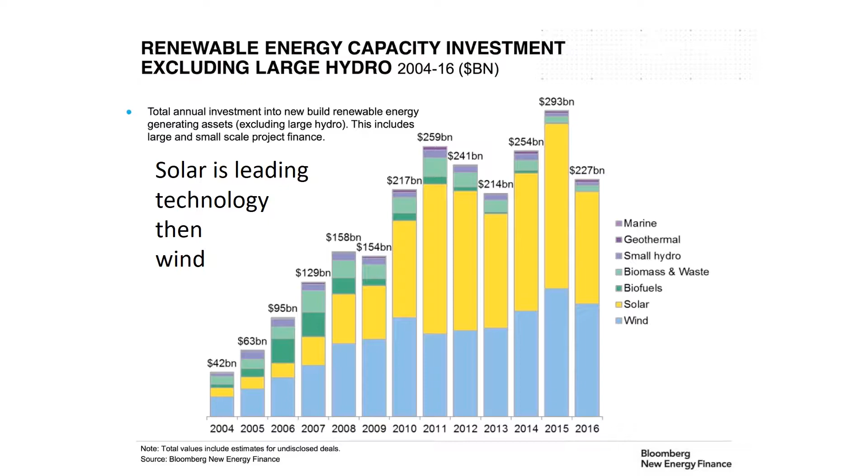The yellow is solar, the blue is wind, and all the other colors are a bunch of other niche solutions like biogas and a whole bunch of other solutions. The ones that are economic and that are dominating the space worldwide are solar and wind. And that has some really interesting implications to energy efficiency and the future of our buildings, the future of how we're going to get around, where we live. It's going to have a lot of impact on us.

So, what solar has done, because it's cheap now, it's so affordable, is it's enabled us to look at buildings in a very different way. You know, if you looked at solar back in the 1970s at the time of the oil crisis, as Tanya was talking about, it would have cost you more than the price of the house to power a house with solar. And that was not that long ago.

In fact, Harold Orr, who was one of the grandfathers of the concept of the passive house in Saskatoon, was asked to build a solar-powered house by the Saskatchewan government at that time. He was at the Research Council. And in the end, he told them, I can't do it because this is not replicable. This is not going to help anybody if we build a house that costs a house to put the solar on the roof. And so instead, he pioneered the concept of the super energy efficient building. And in fact, this guy from Saskatchewan was just recognized in Germany last year for being one of the pioneers in the world of the passive house concept.

Now the passive house, he learned right away that you couldn't achieve this with solar at that time because it was so expensive. And the passive house concept is ultra conservation oriented. So you build a house or a building that is 90% more energy efficient. That's 90%. You require 10% of the energy input of a standard building. And so that's how he got around that, because he was literally forced to by economics in 1977 or whenever it was when he pioneered that.

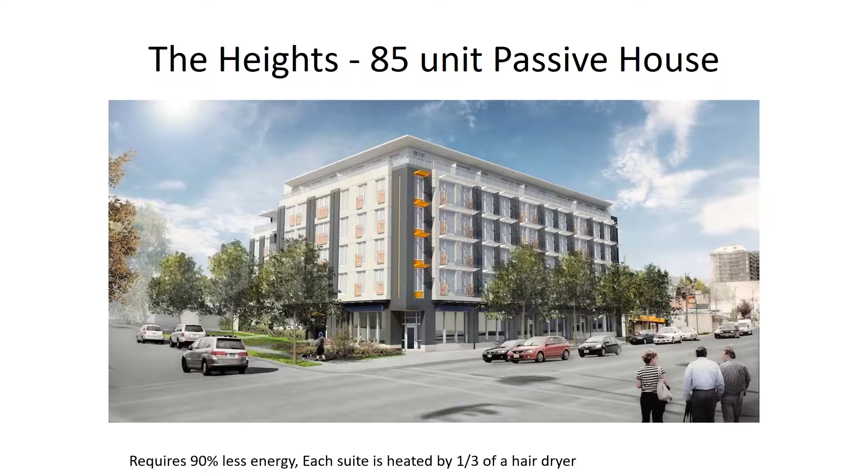Why? Because the city of Vancouver is requiring builders of structures like this that require zoning changes to build to essentially a zero emission standard today. And that standard will be fully implemented by 2020. And so this is a fast-moving landscape, and that's my message, is that the innovation is happening, and following right behind that is policy innovation.

And so this building was able to achieve those goals by building a passive house building instead of using other strategies. And it was so successful, though, and the economics were so good that the architect that built this building, Cornerstone Architecture out of Vancouver, has 16 more commissions to build buildings just like this before they finish the first one, because it's kind of found that magic place for a building.

This building has no mechanical in it. So they omitted $600,000 worth of mechanical in this building, and each suite is heated by 300 watts resistance heating, which is the equivalent of 1/3 of a very small hairdryer. You know, you might have a hairdryer that's 1,500 watts or 1,800 watts. I'm saying 1,000 watts, and 1/3 of that heats each suite in this building.

This is phenomenal, and this is going to impact all of us when we build buildings in a very positive way in the future. So you can't take this idea, by the way, and land it in Edmonton. You have to adjust it because we have a different energy puzzle here. 30 below is part of that puzzle instead of, you know, -5 or whatever it gets in Vancouver.

And just to say about the energy efficiency thing, again, staying at the high level, is that people are embracing this idea of energy efficiency as a way of reducing emissions and saving energy. So in Europe, they've gone right straight to the end game. We sit around here in Canada and we debate, geez, how expensive is it to renovate a home to be super energy efficient? Or what the heck, take it all the way to net zero.

There is a guy in Calgary, and I feel obliged to share this story because I so much admire the guy. His name's Peter Darlington. He's a regular siding contractor in Calgary who makes his living replacing siding on commercial buildings and regular homes. And he started a second company called Solar Homes Inc. And his goal is to start renovating homes to net zero.

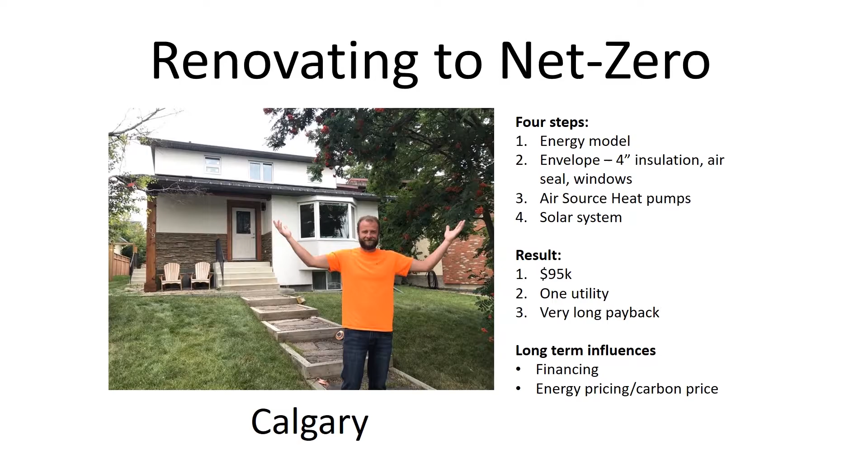So he did his own home. He spent 2 years. He took courses in energy modeling, all kinds of things, and he's learning how to do this. It was very successful. It was about a $95,000 project, and he did take his home all the way to net zero. So now he started a business doing that. It's very slow. He's only done a couple of projects so far, but that's okay because he's still doing the regular siding business. But this is what we need, is people to marry all of the different ideas.

So if you're a siding contractor and you're charging someone $20,000 to put new siding on their home right now, why wouldn't you add $10,000 worth of insulation while you're doing it and pay for the whole project? That's the kind of thinking we need to inspire. This is all happening, and I say that the innovation that's happening is happening through creative people for the most part, and it's not driven by policy. But policy is following that innovation.

In the case of Vancouver, they changed their regulation to allow you to build to the Passive House standard instead of building to LEED Gold plus 22% ASHRAE, which was their present standard at that time, and now it's an OR policy. But you're seeing this happen all over the place. So in Canada, the Pan-Canadian framework is calling for a net zero ready code by 2020. So that'll mean all new homes would be built to net zero ready standard by 2030. So that's pretty ambitious. I used to think it was more ambitious than I think it is now. I think climate change is driving this, but I think innovation is actually making it possible.

I'm feeling every day like this is more possible than it ever was. In Vancouver, they have their zero emissions policy that's coming into play in 2020. BC's experimenting with a step code right now to move towards that net zero, so they're quite advanced in that way. In Edmonton here, we have the Blatchford community coming, so the idea of building a whole neighborhood that's carbon neutral, produces all of its own energy literally within the neighborhood. And we have a sustainable buildings policy and some other stuff that's happening here as well.

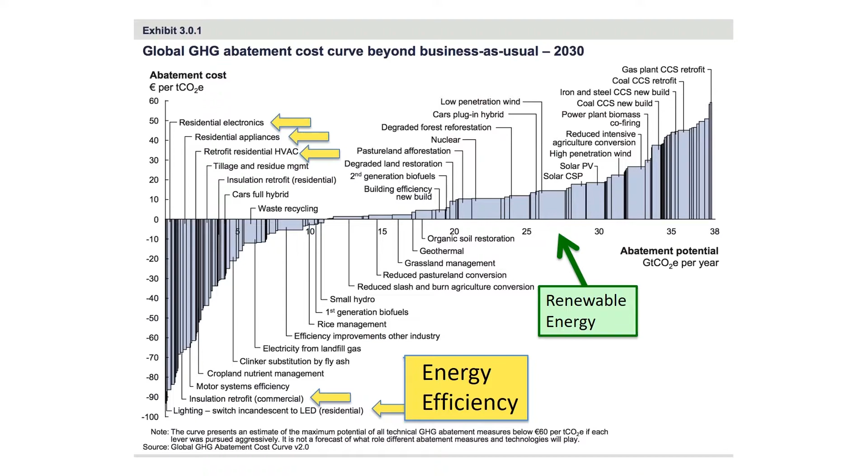And so without surprise, the first 4 or 5 or 6 things on the chart that go the furthest down and make you the most money while you're reducing emissions is energy efficiency. The renewable energy, just for perspective, comes somewhere in the middle. And on the far right, the little line that goes all the way up to the roof is a gas plant incorporating carbon capture and storage. So that's why carbon capture and storage is so challenging. It's very expensive.

So I thought I would introduce you to the concept of energy efficiency a little bit by taking you home with me. I'm kind of geeky about this stuff. So what I did a couple of years ago to learn about this stuff is I installed my own smart thermostat. Who had one of those Honeywell thermostats, the original programmable ones with the screen that was about ½ an inch square, and you needed a microscope to read it, and then you got so mad at it you uninstalled it because you couldn't figure out how to program it? That was me. In fact, I did uninstall it.

And then along came the Nest thermostat, which was invented by Tony Fadell, who's the guy who invented the iPod and the precursor to the iPhone, and did it based on usability. He brought that to modern thermostats, and all of the ones that are successful are total mimics of the original Nest. Ecobee is an awesome thermostat, and a lot of the other companies have thermostats like this. And what's really cool about them is they work.

See, long ago, they stopped putting ratings on smart thermostats. What do they call the system in the US where they rate appliances and stuff? Energy Star. They used to have Energy Star ratings for thermostats, and they stopped doing that. Why? Why? I'm asking. They didn't work.

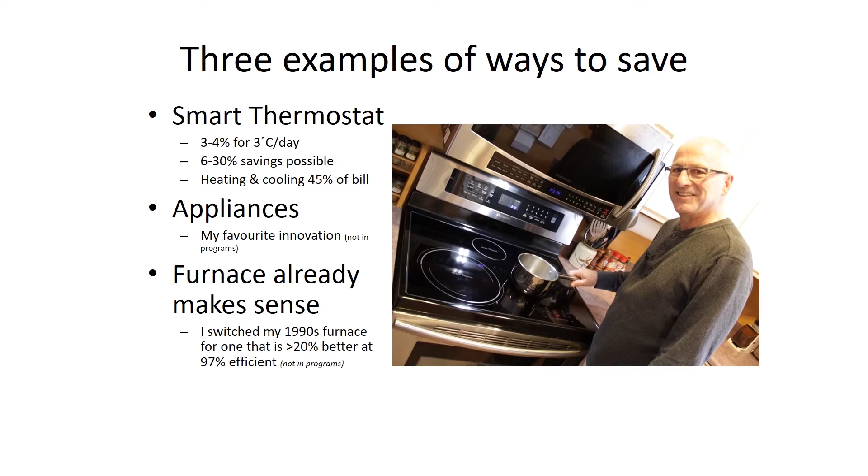The reason I'm telling you this story is, remember the old days when Jimmy Carter was talking about energy efficiency and he talked about putting a sweater on and turning the lights off? Remember that? So my idea of energy efficiency is that it should perform better. Whatever we do, it should be better than the past. We don't have to go live in a cave to be energy efficient. We should actually challenge ourselves more than that, to produce solutions that are better and save us energy.

So this device saves me half on the electricity costs of my stove, but that's not the end of the story. It's my favorite appliance in my whole house. This thing is so much better than any other stove I've ever used in my life, it's not even funny. You can boil water on here faster than you can do it in a microwave.

It doesn't get hot, so you don't burn food on the top. You boil your water, you can put your hand on the burner. It's totally, absolutely even heat. It's a chef's delight. And so that's why I like it. I like solutions that are actually better and actually provide you with convenience as well as solving an energy efficiency problem.

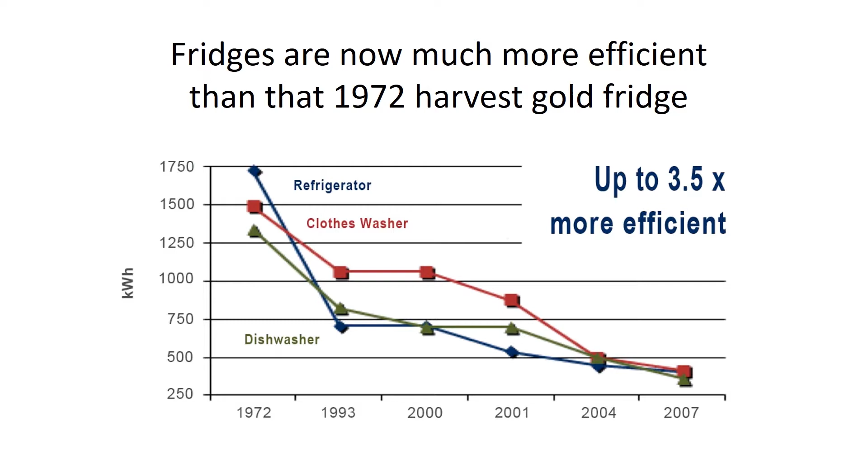So, just as by way of introduction to energy efficiency, all of the devices in our home, sans the two that I talked about before, have become a lot more efficient due to a variety of reasons over the years. And this is a graph starting from the 1970s that shows you most of the major appliances in the home. And the fridge in particular, that old Harvest Gold fridge you might still have in your garage as a beer fridge, hopefully you don't because it's an energy nightmare, used 3.5 times more energy than the fridge you will buy today. And the fridge you'll buy today is better. It probably has an ice maker, and it uses less than a third of the energy. So appliances have improved a lot over the years, and it's worth knowing that.

There are some ideas. There's condensing dryers in Europe that are very small, and they take about 3 times longer to dry. They work fine, nothing wrong with them. They would just come as a bit of a cultural shock to us. Anybody who's been to Europe and stayed in a B&B and used one of them will know this.

And there's another technology coming on that is very promising. That's called heat pumps. So Whirlpool has an amazing large-scale heat pump dryer right now, which I think will be the future of dryers. But unfortunately, the model they have out has a couple of design flaws in it. It has nothing to do with the heat pump. It just has to do with the dryer. And so I think when they get that right, it's going to change.

But for now, the only solution I've found that's better is not one I subscribe to a lot, but it's the clothesline. Again, we've heard about this, and by the way, there's an anecdote here. When we started our rebate program, I didn't notice this at first, but we actually had clotheslines in our program, and I thought it was kind of funny. I thought it was there for educational purposes. Funny thing is, we sold a whole bunch of clotheslines through the rebate program, so some people are actually taking it seriously, and that's great to see.

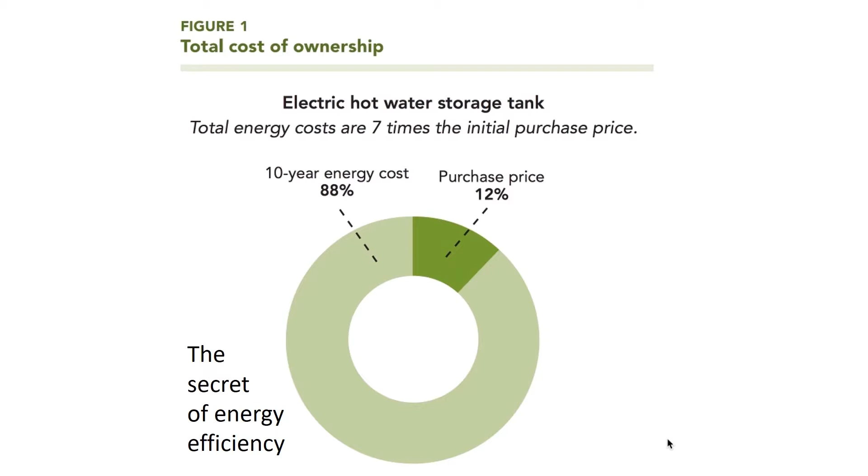We heard about this, I think it was in Tanya's presentation, the cost of your building and really 50% of the cost being the operating costs. Well, when you look at certain devices and appliances, in this case a hot water heater, that's even worse. You go to Canadian Tire, you've saved $100 with your coupon on your new water heater, you get somebody to install it, and you feel great. The problem is, that's not the $100 you should be worrying about.

You should be worrying about what you have to feed that water heater to make it work over the next 10 years. In this case, this graph is made based on a 10-year life. Of course, most of us try to extend it well beyond that. So 88% of the cost of a water heater is the energy you put into it. So that's how you have to think when you're thinking about buildings, energy efficiency, cars. It almost doesn't matter which of these situations we're talking about. So what did I do in my own house? Yep, I had a 20-year-old water heater, which was about 60% efficient.

So I went through the process of researching this recently. I looked at heat pump water heaters, which is definitely one of the up-and-coming technologies. These things are about 250% efficient. And they run on electricity, so that's why you see them in net zero buildings that don't have gas hookups.

In the end, what I went for was a tankless water heater. And it was interesting because I looked at the most efficient conventional water heaters, the new power-vented versions of them. They were more expensive than this. And I looked at the heat pump. They were a little more expensive, not as expensive as the power-vented ones. And this unit was the cheapest of the ones I looked at when I compared high-efficiency devices.

And so this one is the one I actually installed, and it's 97% efficient. So again, I've gained, boy, that's a lot of math, 37% efficiency on heating. And again, water heating is about 20% of your demand for heating. And in buildings, in commercial buildings and businesses, it's even more so. So heating and water heating are even more dominant in terms of energy use.

I just wanted to tell you one story about energy efficiency. We have great programs, and you should take advantage of our programs, whether you're at home or your institution, and we can help you do that. But back to this scenario of common sense, I wanted to tell the story of a guy I met from St. Albert, Alberta. His name is Ron Kube.

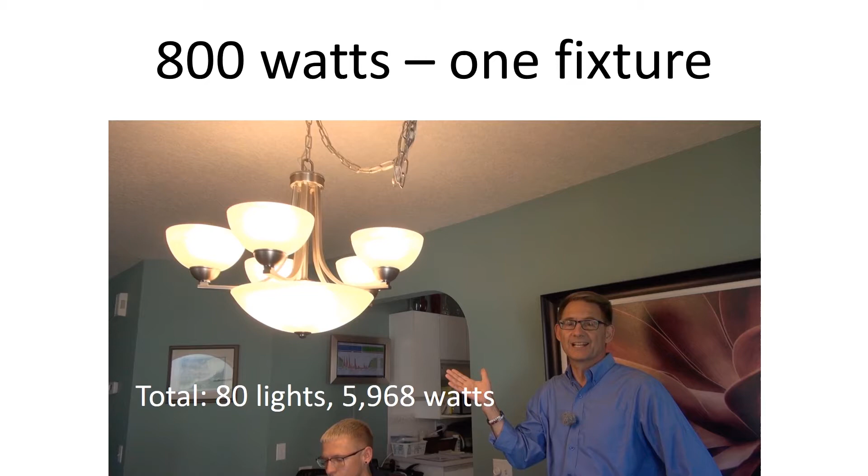The worst offender he found in his house is this guy. He had 800 watts of lighting in his dining room, which is now about 70 or something like that. His total lighting, all the lights in the home, if you turned them on, would have added up to about 6,000 watts, which is unbelievable.

So the second thing he found, and this is why I love telling this story, is like the cliche of energy efficiency, because he had one of those old fridges in his garage, and all it had was a few bottles of beer and a bottle of wine in it. And he found out this was his second biggest consumer in the house, and so solution, unplug it.

Very simple. The third thing he found was, you guys know what phantom power is, or power vampires? You guys heard that term? So all those little things, your chargers, your VCRs, your TVs, your computers, your hard drives, all that stuff that's all plugged in and using energy even when you're not using them. Printers are notorious.

You might use your printer 2 or 3 times a week, and yet it's sitting there consuming 20, 25 watts of power 24/7. So he had the most modest entertainment system I've ever seen. He's got to see the one that my kids have. I have a much bigger prize than this, but he was able to cut that in half, and he found it was 7% of his electricity use in his home, all those power vampires.

So he just bought some power bars and cut that back, and lo and behold, when he was done, he reduced his lighting from 340 kilowatt hours, I think the units were per month, or was that per annum, I can't remember, to 75. So you can see, really dramatic.

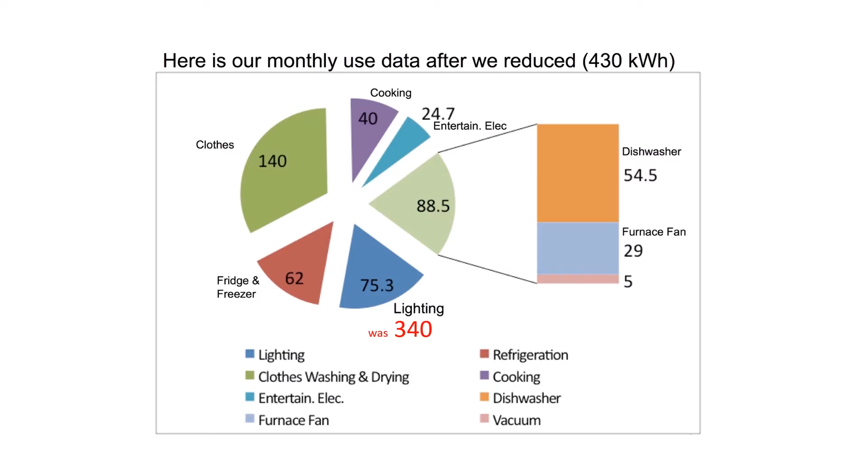He reduced his fridge and freezer. So his beer fridge was using more energy than his modern fridge and freezer combined. And by unplugging that, he shrunk that part of the pie as well. And he shrunk his entertainment system from 65 to 24. So that was pretty significant. And no change in lifestyle whatsoever.

So this is his new one, I just put the graph over it so you could see the original graph. So see the lighting there? That's the blue. So now where is he? Well, I'm going to abbreviate the story, but he still got to install a solar system after he reduced his electricity use, but he did it in 2015. So he'd only done some of his energy efficiency measures, and you're allowed to put a solar system as large as your energy demand on your home.

So he did. He put, I think it was about a 10, I'm spacing on the size of the system. I think it was 8 kilowatts or something like that. I can't remember. But it was matched to his energy use. And then he kept doing energy efficiency.

And so guess what happened? He started doing some more math. The guy's a professor, remember, so he couldn't help himself. And he figured out the value proposition of that electricity. So if he sells it back to the grid, he gets 5 cents or 6 cents or whatever he's paying for electricity. But if he bought an electric car, he found out his surplus electricity was enough to move a Nissan Leaf 20,000 kilometers a year, the average mileage of the average car driven by the average person in a year.

So either they were made more, well, it's a combination of things. They may have been made more poorly, and they have some inefficiencies built in. And I'll talk about that in a second. So if residents don't pay their utilities, they also found that residents will use 133% more energy in the home. So they'll leave the windows open when the heating's on, whatever, a whole variety of things. You just don't care, so you waste energy.

So in these buildings, what an energy advisor that the social housing agencies hired, which by the way was a great thing to do, they hired their own energy advisor to help all of the different social housing agencies access funding, determine whether it was a smart thing to do these projects. It was just a really smart thing to do. So their energy advisor goes around and identifies whether different agencies can qualify for grants, and even helps them with the analysis of whether they should spend their own money doing energy efficiency projects. It's been very, very successful.

And so in these buildings, a lot of them have a lot of low-hanging fruit. So what he winds up doing is a lot of boilers and some lighting and some hot water systems as well in these buildings. And so they've been able to save 10 to 30% with a very simple upgrade, which is some of the things that we're seeing in Alberta right now today.

But the whole behavior thing is even trickier. So the reason I bring that up is because we have residents in our buildings. It's not easy to manage those residents. So you want to be cognizant of that. You want to be cognizant of what you're doing has a behavior component to it. And if it does, do you need to manage that component? It's very important to think about that. And I think that's it.

So from my perspective, the reason I get jazzed about energy efficiency, there's a lot we could have covered here, but hopefully Mark will touch on the tangible stuff for you. But the reason I'm excited about energy efficiency is our program here in Alberta is modeled after one in Nova Scotia and one in Oregon and Vermont, which are some of the most successful programs in North America. And if I can show you this graphic a few years from now, this is the annual report from Nova Scotia that tells you how successful energy efficiency has been.

The minister said at some point we should talk about energy efficiency as an energy resource, as an input to the system, a negative input into the system, which is actually worth something. In Nova Scotia, energy efficiency actually bids into the grid every year. So they get their funding just by bidding into the grid at a price. And they'll say, we'll provide you with X kilowatt hours at 3 cents a kilowatt hour in terms of megawatts. And that's how they get funded in Nova Scotia.

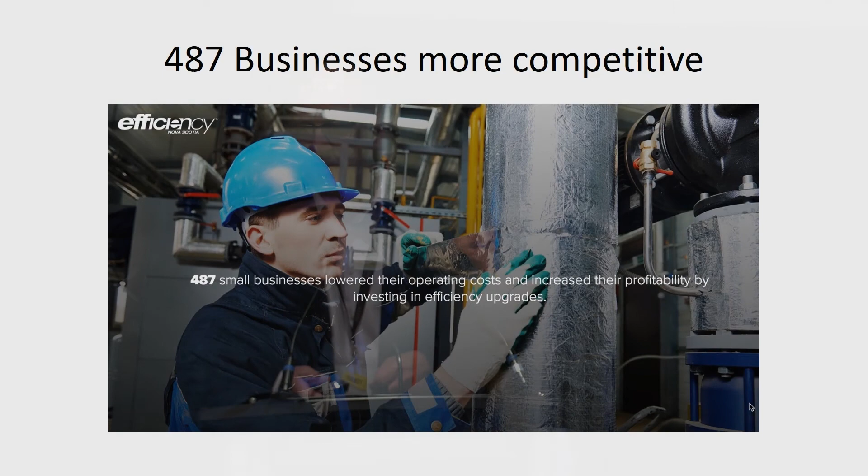So in Nova Scotia, they've managed with a very similar structure that we have here in Alberta to save their residents and businesses about $110 million a year. Last year, they engaged with 487 businesses. That means there's 487 businesses that are just a little bit more competitive and have lower operating costs. They take credit in Nova Scotia, and it's a much smaller program, for 1,000 jobs, just as a result of energy efficiency.

And to the minister's point about looking at energy efficiency as a resource, this is 8 years into their program in Nova Scotia. They have saved 1% of all provincial electricity demand per year for 8 years. So they've reduced electricity demand in Nova Scotia by 8% and consistently at about 1% a year, which is huge. That's a number of power plants worth of electricity.